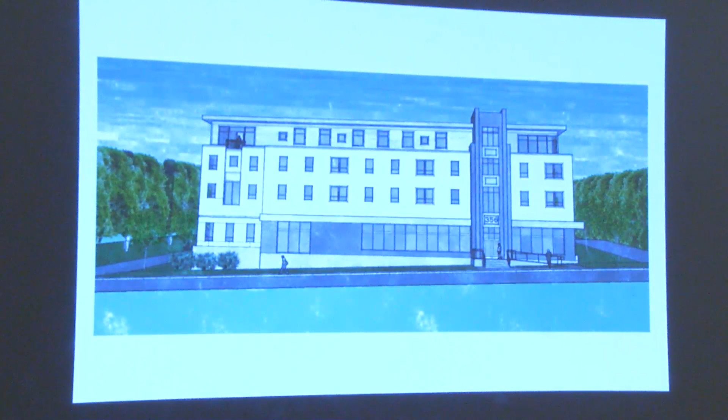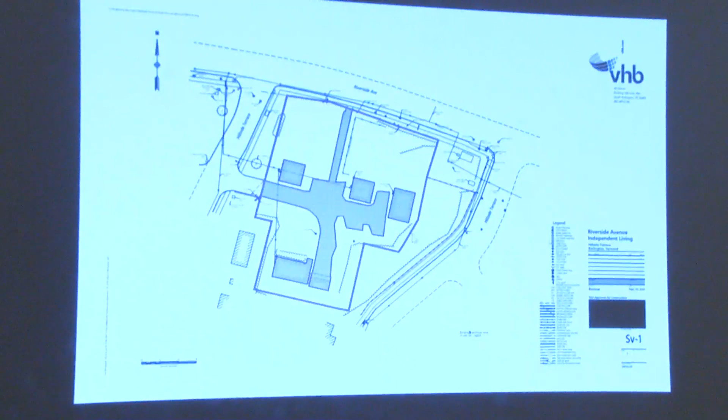Just a question on the previous slide - on the west side where your property goes up, I'm assuming that's the right-of-way for Hillside Terrace? Yes, but there's a lot of land between your property line and Hillside Terrace - is that the right-of-way for the road? Yes. I believe the right-of-way terminates at a certain point, but there is Hillside Terrace right-of-way and the existing legal access. On the other side you have this line, which is the property line, and this other dashed line that generally follows the right-of-way. So the Burlington Housing Authority owns this finger of land that sticks up between the road and the parcel. Thank you.

This is looking directly south from what would be Riverside Avenue, and we're proposing along the Riverside Avenue frontage a basically 3-story building with a walkout basement. You can think of it as the main building above, but we're also providing this lower level that helps engage the street.

Are there activities going to happen on that level? No. It's a complicated site, so we looked at the opportunity to go down into the hillside for subterranean parking, and it just didn't make sense.

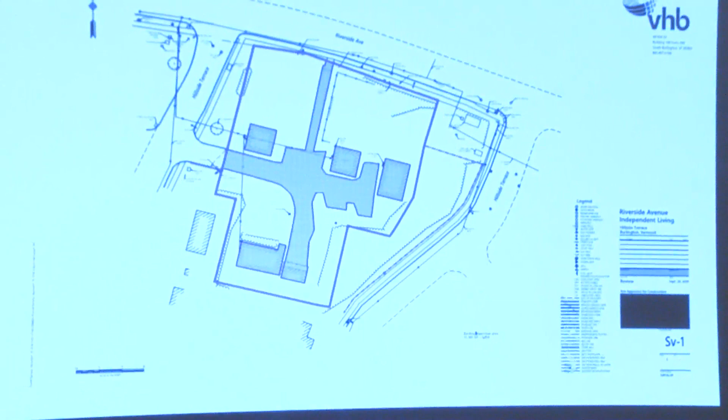So the easiest way to explain it is on elevations. The interaction with the street is roughly at a 202 elevation, and the entrance off of Hillside Terrace - do you want to go back one? The street entrance off of Hillside Terrace is at an elevation of roughly 212.

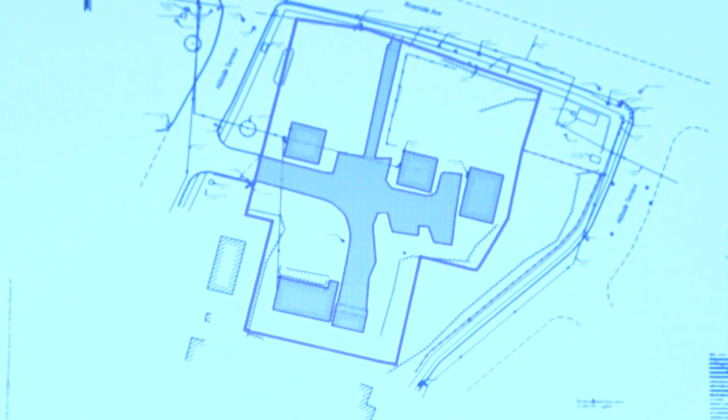So what we came up with for a design is surface parking at that 212 elevation, the first floor of the building. We looked at an opportunity to take that 10 feet below and build some service area that would interact with the street, to bring that vibrancy of the building to the street and vice versa. So it is a 3-story building that sits on top of a walkout basement.

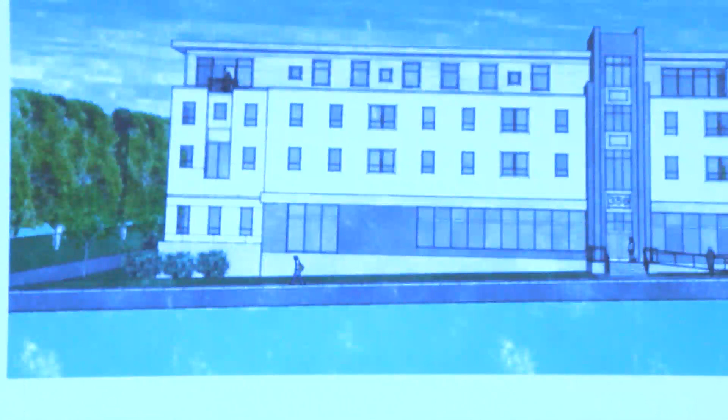I think technically it's called a 4-story building. But aren't other uses, like retail, encouraged in this type of district? It's encouraged, but not required. Not required, okay. And I think your question was, is there activity on that lower level? The answer is yes, there are common areas.

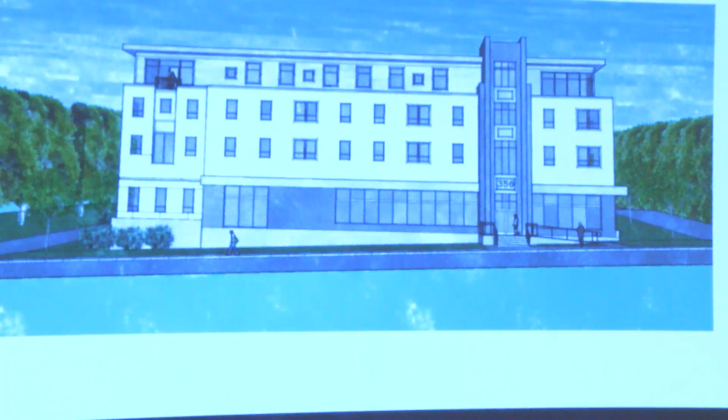Common areas being - we envision potentially putting food service down there, and on the backside, since it's buried, perhaps storage. Storage in these communities is at a premium, so this offers an opportunity to put enclosed indoor storage. Having the food service component interact with the street and perhaps some common living room area as well makes for a nice feature.

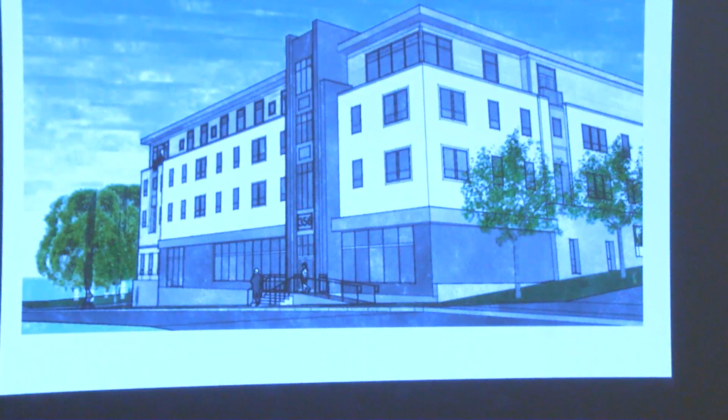I think we have another project on Riverside just down the way, and we had a conversation about the front entrance and the sidewalk that it connects to. I see that you've got some street connection - if you go to the overall site plan, you're fairly close to the street. Is there any sidewalk at that part of Riverside that you're connecting to?

Yes, so - got a picture of it here somewhere. There's a pedestrian sidewalk along the south side, a multi-use path on the north side, with on-street bike lanes on both sides.

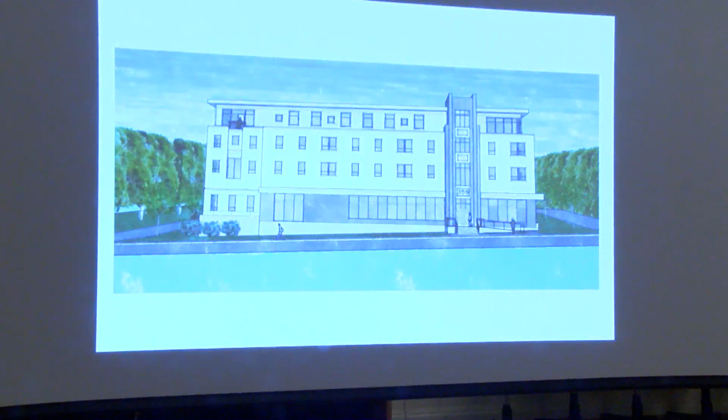So is there a sidewalk on the side that you're building on? There is, yes. Okay, and where's the nearest crossing? Like, is there a lighted, protected crossing on Riverside? I think it would be at the corner, at the light.

So this is the sidewalk on the side of Riverside Avenue where the development is. And then there's a crosswalk, so we're developing here, and there's a crosswalk immediately on this side here.

Did you give any thought to any mixed-use commercial development? I hear what you're saying about the limitations of the site, but can you tell me a little more about appropriateness for it there?

One of the trends in the industry right now is partnering with a small cafe or food service operation, for both the residents and the community, as well as making it a benefit for the operator. Oftentimes in those scenarios we provide a zero rent situation in exchange for one meal a day for the residents. That's something we're exploring, but we haven't settled on it yet. Some of the challenges we see are vehicular activity, access, things like that, so we want it to be a viable option, but that is something we're considering.

I don't see in this location it being any sort of large-scale operation. The other model we've looked at is partnering with a catering group, similar trade space for services, but that really all has to be flushed out in programming and design. We've got to see how much space we have, and exactly what we can get in there feasibly and meet egress.

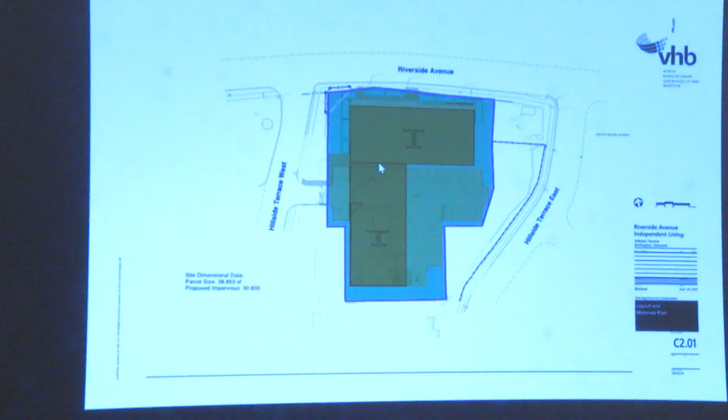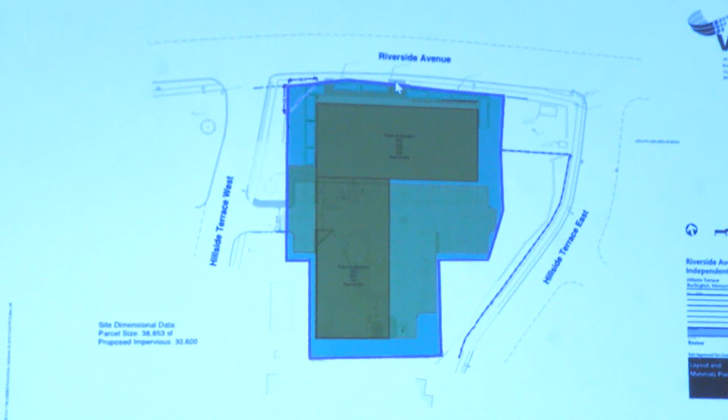So the primary main entrance will be from where you enter it? The parking is underneath the building, so you're entering through the parking lot for pedestrians who live there if they're driving. Other pedestrians, there'll be a door. I know we don't have a lot of information, it's a preliminary thing, but my reaction is pedestrians should be able to get into the building in a nice fashion. Yeah, they've got the front entrance.

Does the street entry reach the elevator? Will that access the elevator? Yes, on the same grade.

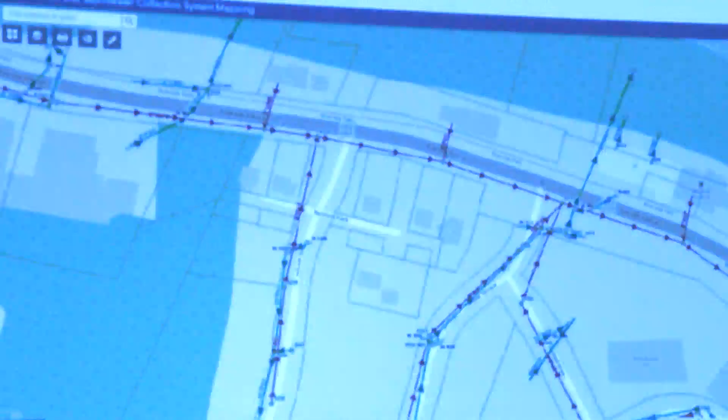From Riverside—if I understand, the street entrance would be what you'd refer to as a walkout basement, which we're thinking of as level 1, and the parking entrance would be floor 2, the first actual floor of living space. Correct. I can see in this rendering how that would work.

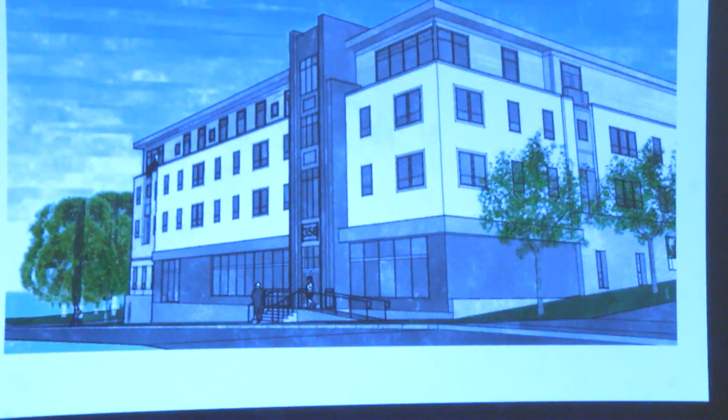Zora, you have a question? I'm going to break my own rules and talk about parking. So you're asking for a parking waiver—do you know what the minimum requirement is for this development?

Well, the waiver I'm hearing might not occur depending on the number of units. The sketch plan says 65 units, and I'm hearing more likely 55 to 60, as we're beginning to flush out how many square feet we have to work with. And the parking requirement is 1 per dwelling unit, so for 60 units that would be... but that was your question? Yeah, mostly. That's easy.

I have a question about emergency access. I just went through this with Winooski—they were not excited about a pass-through at all, and that may also be an issue for Public Works. Seniors tend to get visited a little more by emergency services, so I'm concerned about two things. One, that the entrance an ambulance or fire truck would use is the pass-through entrance—I'd want that really vetted with emergency services, to have them say they're okay with this. Two, make it clear where the emergency entrance is, because what would probably not be good is if every time an ambulance or fire truck came, they had to sit in that travel lane on Riverside.

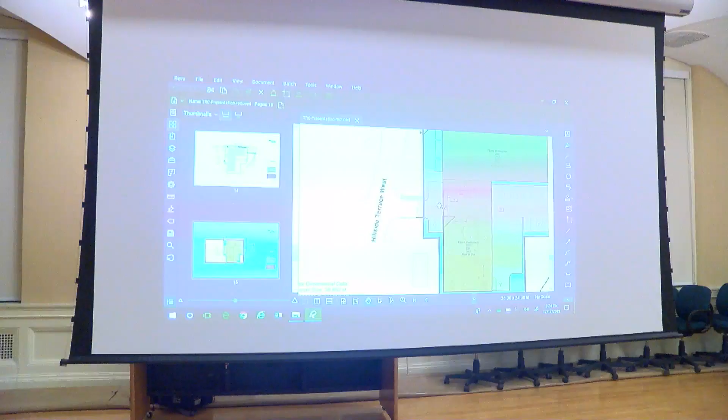We own and operate these buildings. The primary entrance will be on the south side, and there is parking outside of the pass-through. Initially we're showing the handicap spot underneath the pass-through, but also outside. If one of the big fire trucks is the first responder to a fall incident, we want to make sure they have a place to pull in, operate, turn around, and get out without an issue.

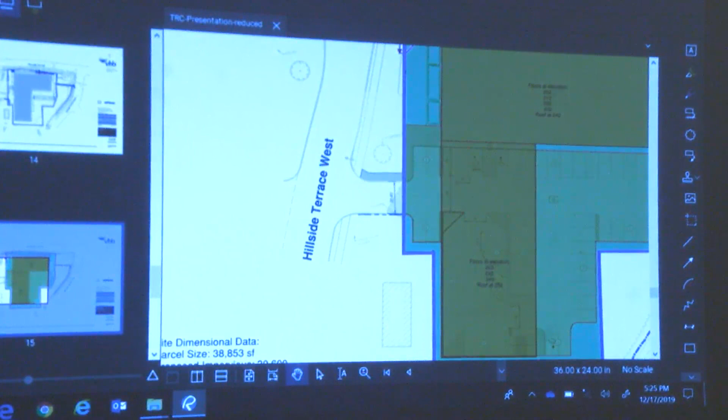In general, I like to see that we have senior housing in Burlington. I think it's probably a good location for it, and there's a need for it. Overall, I think the project is pretty much on target. I don't have a lot of concerns in terms of scale or scope that make me think this is way out of line. Riverside is a developing area with some larger projects, and it seems like a good infill project.

I don't know if you finished your presentation there, on the utilities and the stormwater management we're looking to do.

On the site, most of the utilities on Riverside, or all the utilities on Riverside, are underground. We'll be making connections to power, sewer, and water along Riverside Avenue. Stormwater we're going to collect from the roof drainage from the building and a parking lot inlet, and place into underground stormwater attenuation tanks.

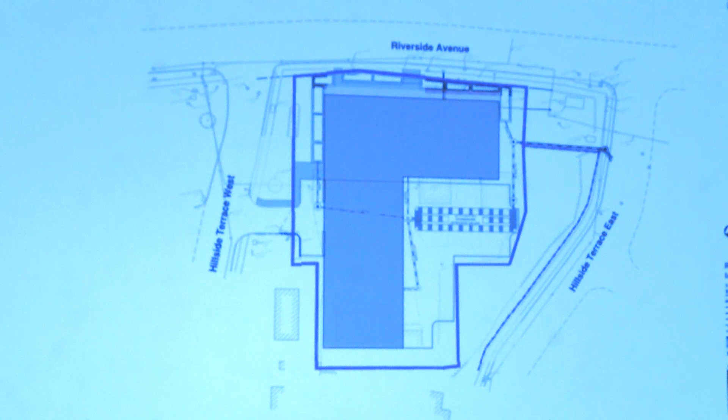For the more frequent 1-inch storm, it'll be routed around the west side of the building through planter beds to provide filtration and treatment. Larger storms will bypass that, bypass the planter beds, and go out the east side, where it'll connect to the existing separate storm system across Hillside Terrace, then discharge with a larger drainage shed across Riverside and into the Winooski.

We're confident that we can provide for this 9/10 of an acre lot the required stormwater measures on site for both treatment and attenuation for the system.

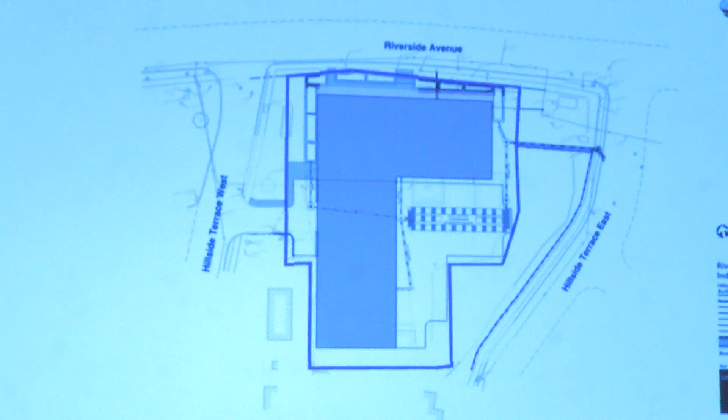Is that near the area of that slope that's had some slope failures lately, where you're discharging on the backside of Riverside? I know there've been some serious issues. It's discharging in a different location. There are various issues along the slope, but this goes into a pipe situation on the north side of Riverside. Even though it's in the general area, I don't think this project is directly related to that situation at all.

So, a couple of things - trash location, do you have dump trucks or trash trucks pick it up? No, they'd be backing into the entrance here, and there would be a trash room in the southwest corner of this building, to the west of the main entrance, wheeled out by hand carts.

The outline we're seeing there, that's the property line, right? Correct. And do you anticipate having any landscaping on the project? Yes, I don't expect to have it designed now. I'm just curious whether you can just go right up to the property line. Yes, we'll need to work through a landscaping design.

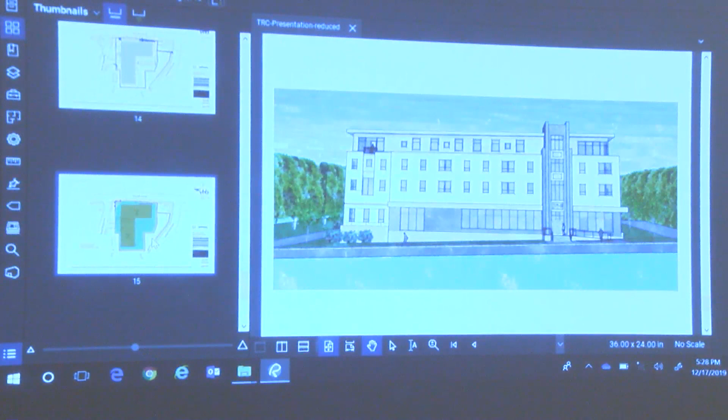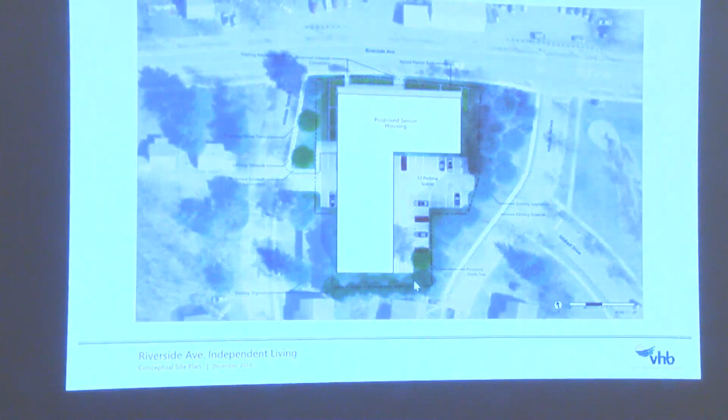There's also going to be some retaining wall on the uphill side, so that will all have to be engineered and figured out - we don't know to what extent yet. We are doing some geotech work up front, having borings done next month, and we'll have a better understanding at that point of what we need to engineer there, and then the landscaping will filter in on top of that.

From the Riverside side? Correct. And does it keep rising as it heads away from Riverside? Not at the same rate, but there's still a small incline.

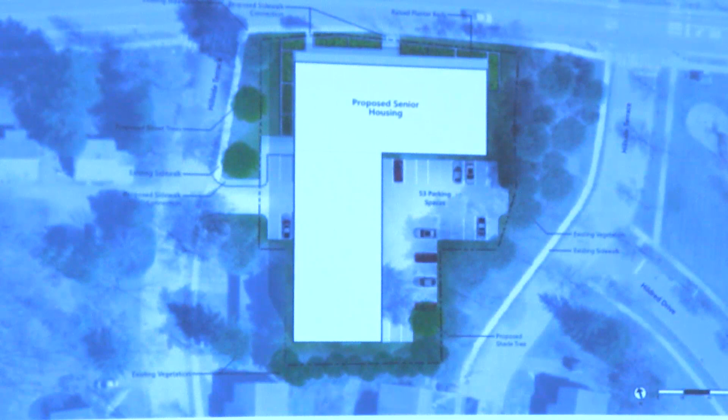One of the things that strikes me is on the Riverside side - that is theoretically the main entrance to the building, right? For all practical purposes, yes. Unless you're driving. So having a cover over the walkway and entrance would seem to be important, especially for snow conditions.

It is covered. This is what's confusing about this building, so everybody understands.

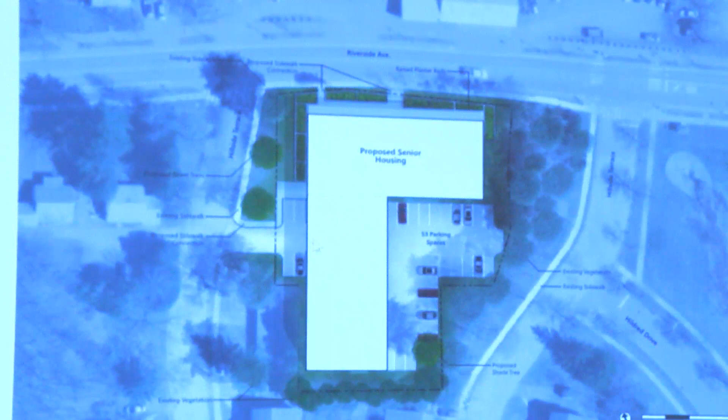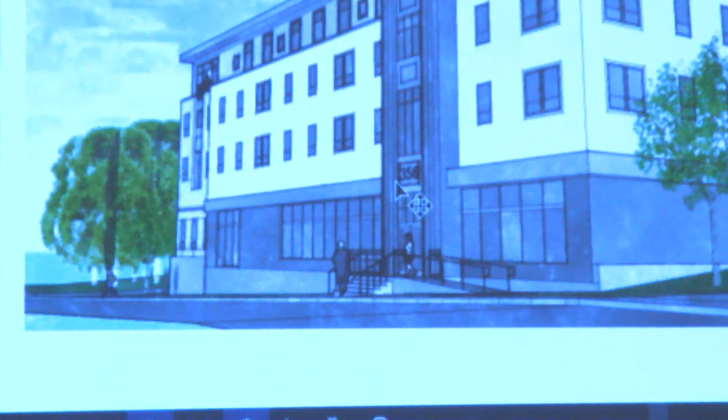When you drive in the driveway at 212, the entire lower end of that building - can you move the cursor? See where it is? That entire elevation doesn't go to the ground. Going back to parking, along Riverside Avenue, would you consider a canopy there? This is the Riverside Avenue side. I see that as the main entrance of the building, unless there's another real entrance shown on any elevation.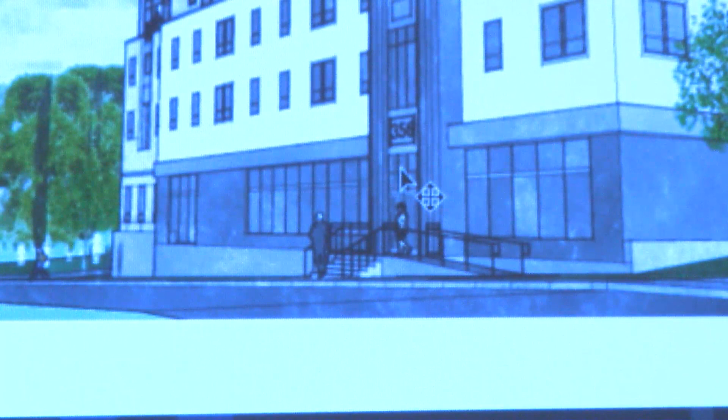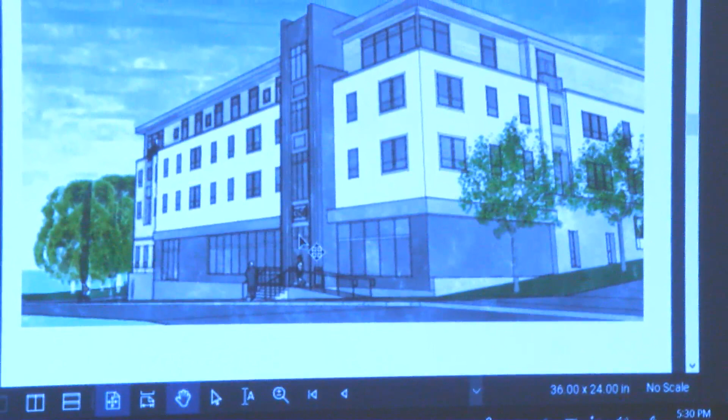So you're thinking a canopy would make sense, some kind of cover? And am I correct that people can walk through there and end up in an elevator? Correct, the elevator would go to the entire building. But I do have some concern about what ends up on that ground floor - it could feel like an abandoned space, or it could be made more attractive with other activities.

Right now it's a pretty blank facade. Food service is nice - if there's some activity. I used to walk by a senior living facility every day when I worked in Philadelphia, and that was food service. As indicated, food service is the largest user of space in these buildings, so that is likely what will end up down there. I don't know what else - I know it won't be units. That's fine, as long as there's activity.

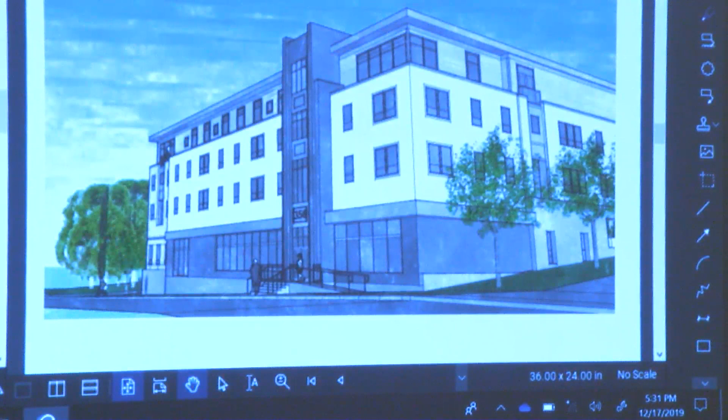As far as the blandness of the building, this is a very early sketch. Scott encouraged me to bring a rendering, which always makes me nervous at sketch plan. Well, we can see it's a building and it gets vertical and it's not green or pink or something like that.

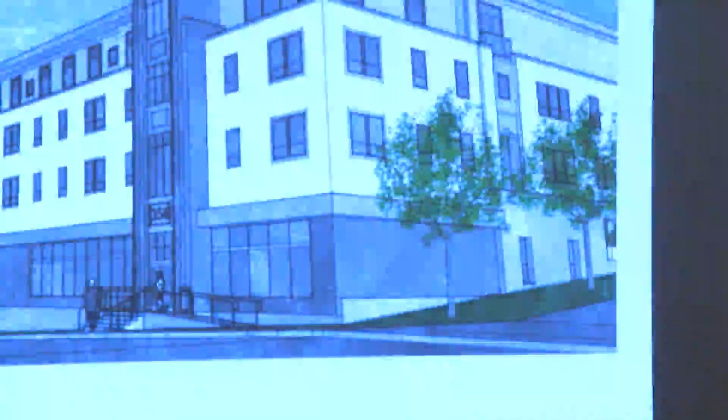So I don't know if there's more you want to add, or any other comments from the board? Like I said, it's preliminary - it's our opportunity to give you some feedback, and the feedback is sort of limited on what we get.

A lot of access, I'm hearing. Yeah, I think what people like about Riverside is that it has pedestrian access - you can get bus service, you can walk along there, you can get to some parks. And so it seems like the building should be able to address that area.

Well, we definitely see that as an opportunity, and how the programming for the building unfolds will a bit drive the access. Historically, from the 400-plus units we've developed, the people who live here and those visiting them will enter on that 212 level through the residential entrance, either getting out of their car or parking undercover, with the exception of folks using public transport. The 80% of traffic through the building will flow through that covered entrance. That said, we're excited to look at the opportunities that ground level is giving us, and as we decide that programming, that's going to help us shape what we want to do with that entrance.